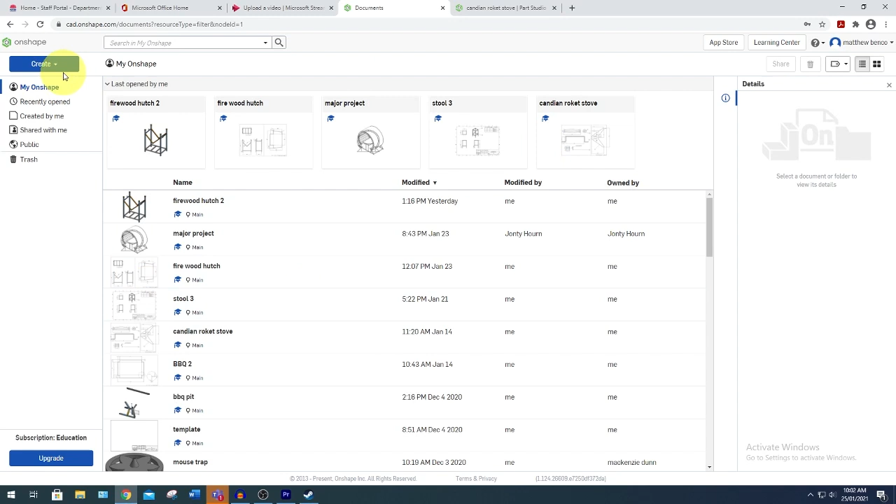Okay guys, here today we're going to be making the Canadian rocket stove on OnShape. First thing you want to do is come over here to create and then go to document. We're going to call this Canadian rocket stove. I'm going to call it Canadian rocket stove 2 because I've already drawn it. And we're going to wait for that to load in.

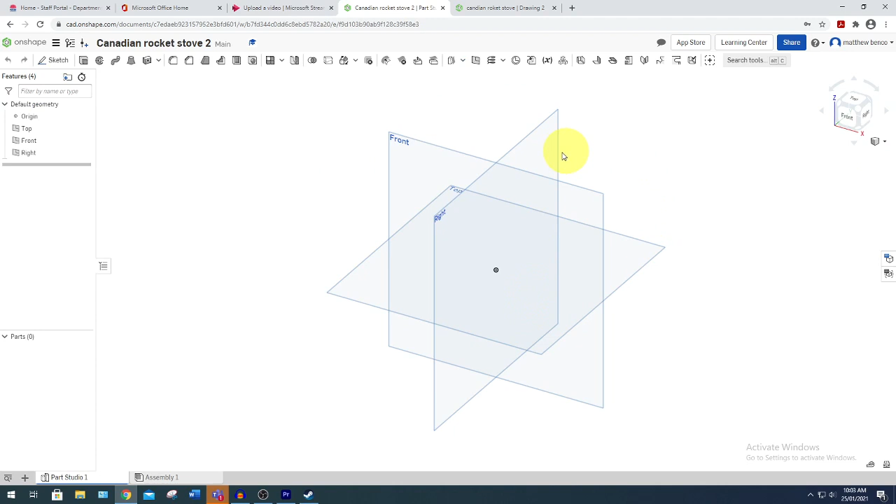There are 24 different parts that we need to draw, and in this first section, the part studio is where we draw them. So we're going to focus in on top, and we're going to use sketch, and then click on top. We're going to come over here to the line tool, and we're going to go from the origin up into the air like this. And we want this to go up 59 mil. And we're going to have a line coming up like this, and then back down there.

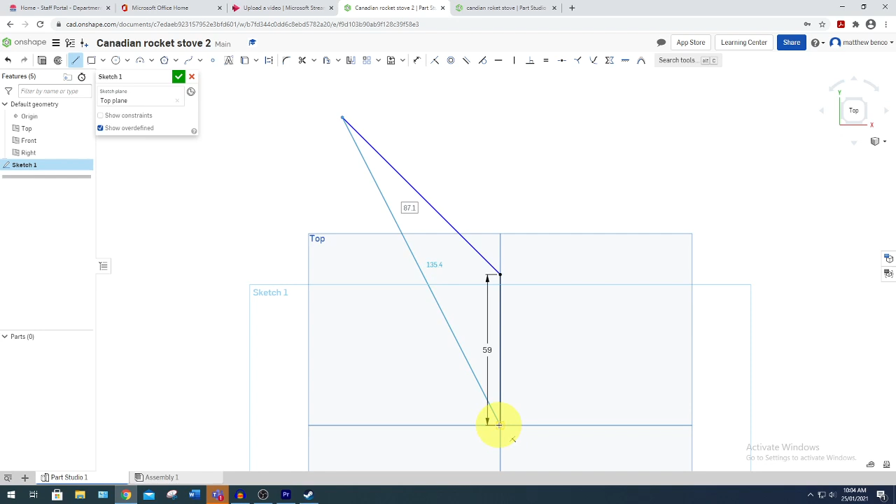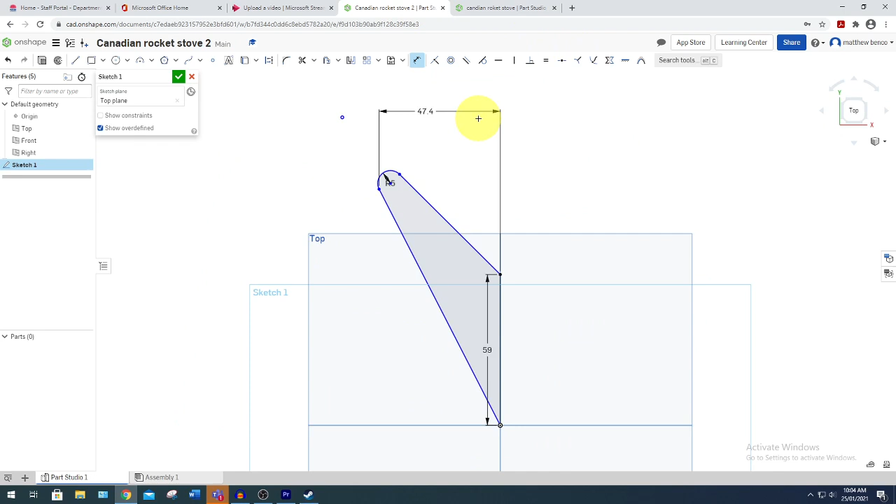We're going to use this fillet tool, and we're going to fillet between this line, and it's going to be a radius of 6 mil. We're going to grab our dimension tool. We're going to go from this edge of the radius back to that point there on that line. And that's going to be 72 mil. We're going to go from this point of the radius back to that edge of the line and drag it out like that so we get the height. And that is 108 mil.

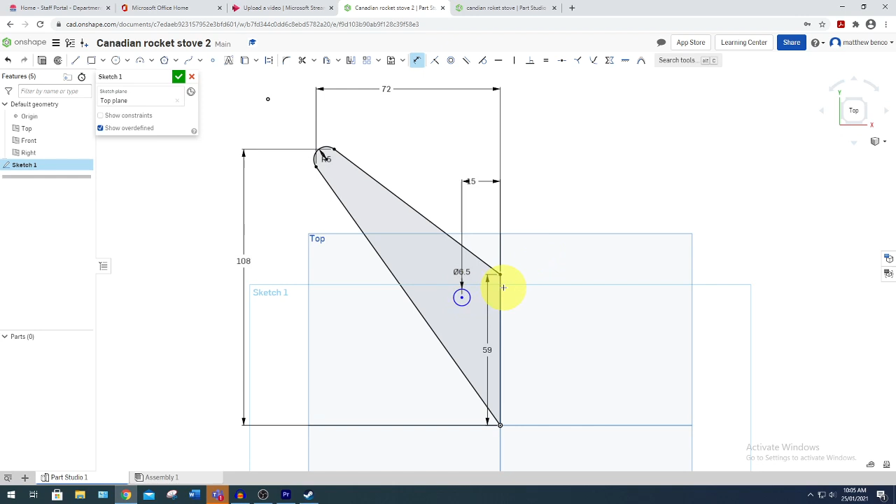We need to put in a little circle just there. So we use the circle tool and just drag it out there. This circle is 6.5 mil diameter. And we need the dimension from the center of the circle back to there. And that is 15 mil. And from the center of the circle back to here. And that's also 15 mil. Push the big green tick, and that's our first sketch done.

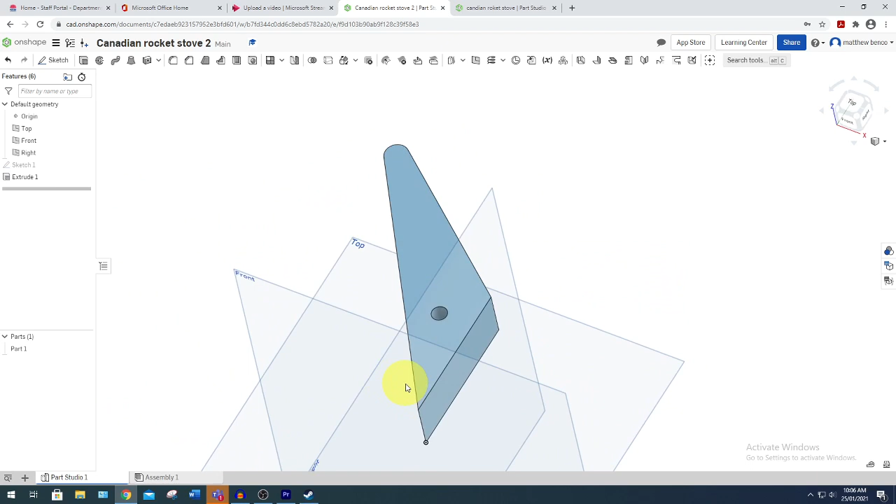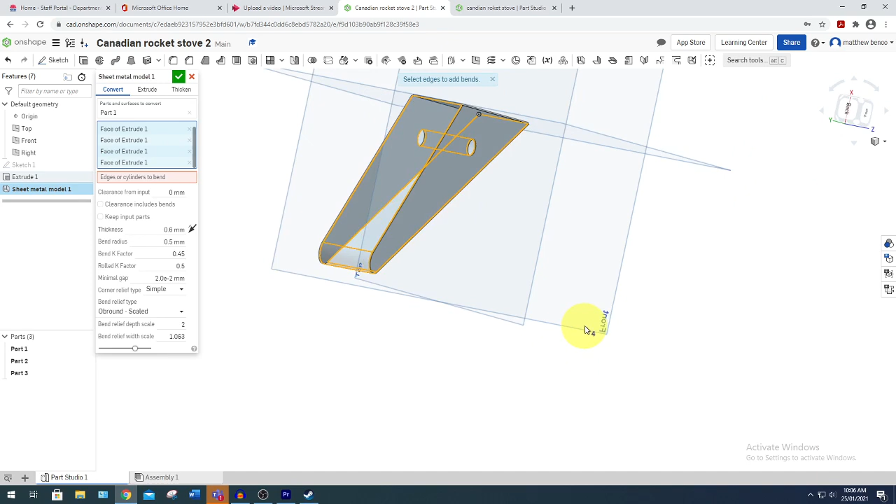Now what we need to do is we need to use the extrude tool to extrude this out. And this comes out for 22 mil. And now we have this block. What we want to do now is use this sheet metal model button, and we're going to select what we've just drawn as the part to be converted. Now faces to exclude, we don't want this one, or this one, and we don't want the inside of that circle either. So we have these three faces here that we're going to bend up, and this is going to hold our leg.

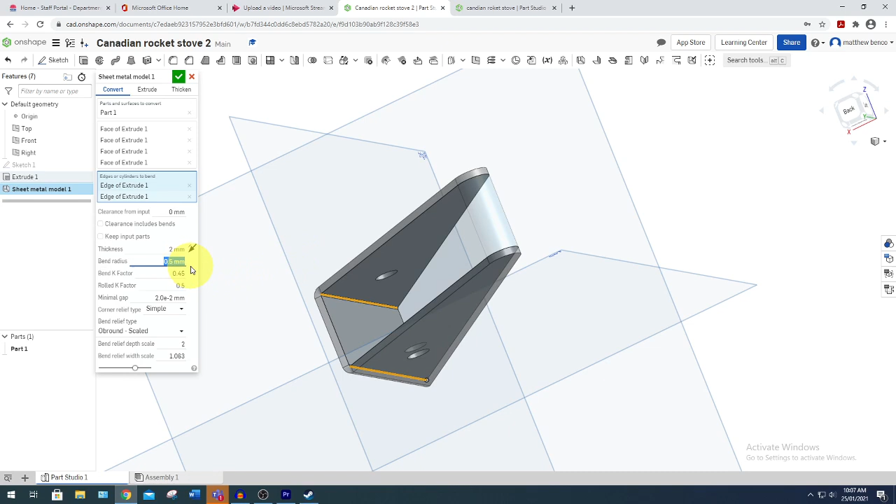Edges to bend, we're going to have that point there, and that point there. We need to make sure that the thickness is 2 mil, because we're using 2 mil checker plate, and our bend radius is just going to be 1. Alright, and that's what it's going to look like. We need to come down here to parts, right click, go to properties, and we call this leg assembly.

Hey guys, Future Mr. Benco here. Since making these videos, I made a bit of a discovery. So throughout these videos here, I add the name of each part into this section here. You don't actually need to do that. The only thing you need to have in this section here is the measurements, not the name. And it's going to be 108 times 175 times 2 millimeter checker plate.

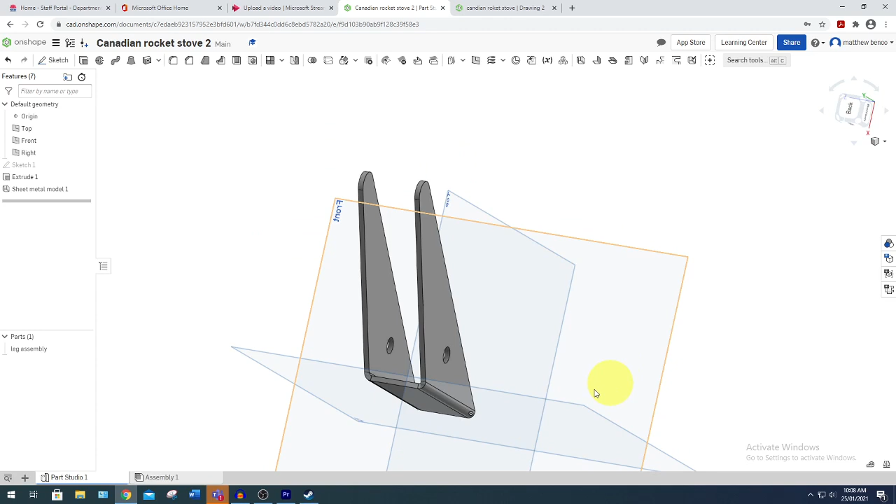And this is part number 1. Save. And now what we're going to do is we're going to hide that away so it doesn't get in our way for drawing the rest of our drawings. Now what we're going to do is we want to focus on right, and we're going to do another sketch. We're going to get the circle tool, we're going to go from the origin out like this, and this is going to be 250 diameter.

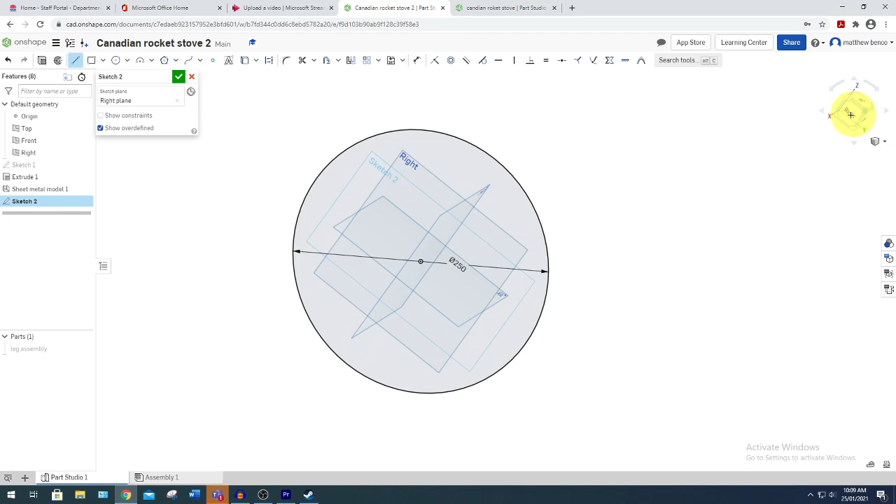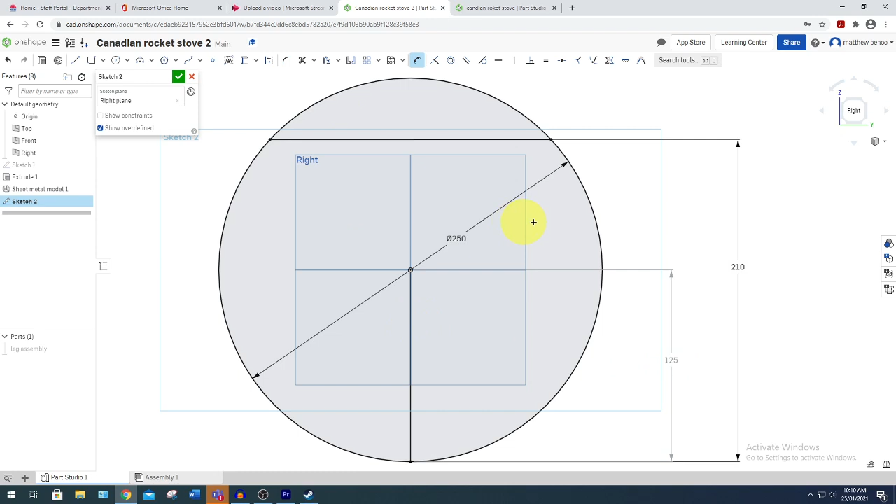We want to have a line that goes straight across here like this. See how it's a dotted line? That means it is parallel to the ground, or this axis here. So what we want to do is draw a second line coming from the origin straight down to the edge of our job here. And then we dimension from the bottom point to that line. And that's going to be 210. We're just going to put that line out there like that. So now we can use this trim tool and we can trim that top off.

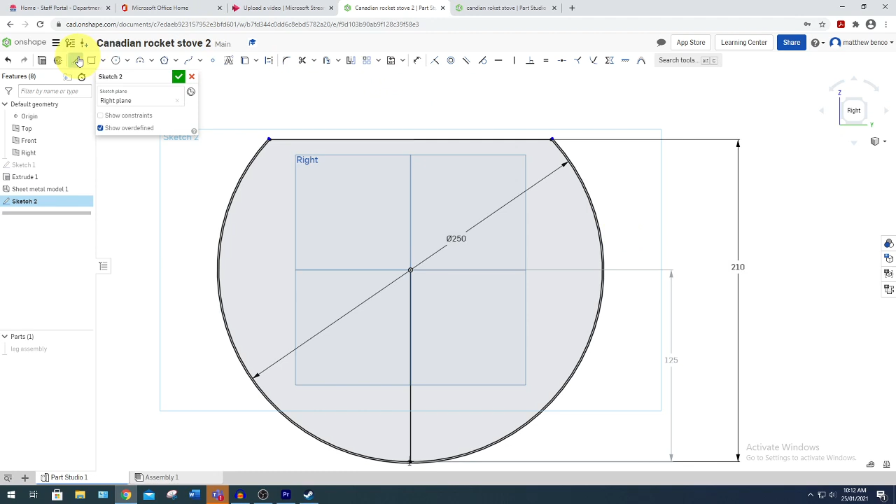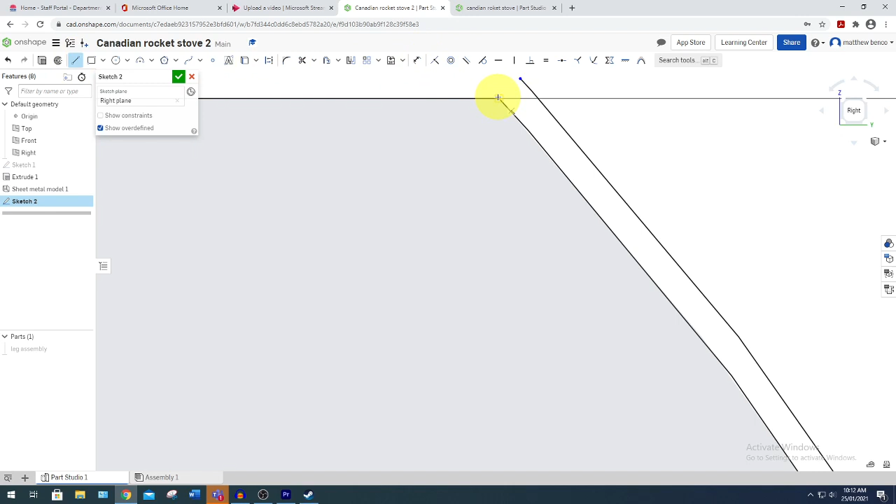What we're going to do now is use the offset tool, select this, and go out like that. And this is going to be 1 mil offset. And then we're just going to have to extend this line back here. Trim, get rid of that extra bit. Remember when you're zooming in and out that you zoom towards where the cursor is. That is our barrel sketch done.

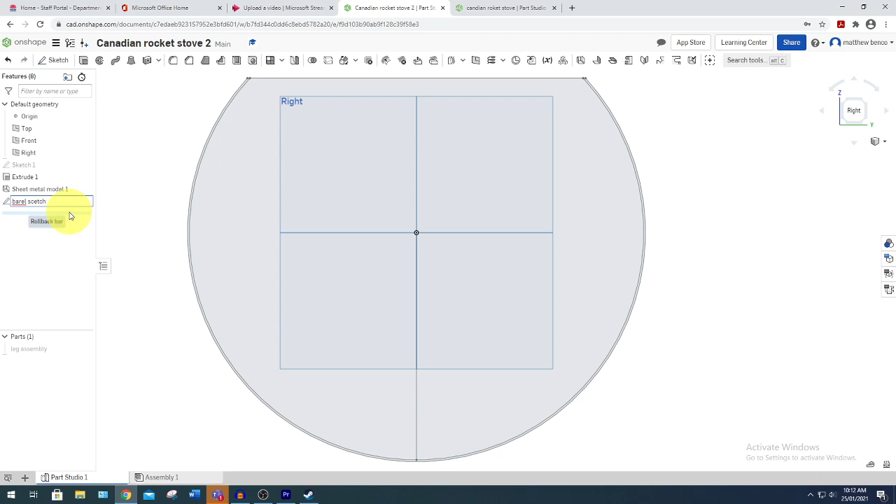And what we're going to do is we're going to come over here to this sketch 2 here, and we're going to rename it because this is kind of an important sketch. We're going to be using it a few times. Call it barrel sketch. Okay, we're going to now extrude that tiny little sliver over there. And we're going to extrude it for 544 mil. So that gives us the barrel of our Canadian rocket stove.

So we're going to right click on this, properties, call it barrel. And this is going to be 544 by 580 by 1 millimeter black sheet. Part number 2.

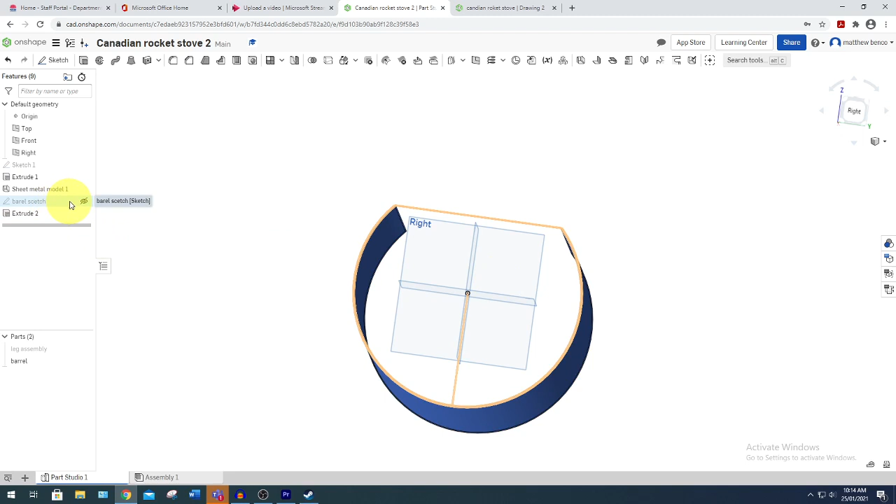So you see how our barrel sketch is now being hidden? We need to just click on this little eye icon and that's going to bring this back. We're going to hit the little eye icon and hide the barrel. We need to come up here to this plane tool, and what we need is the curve point. We want to be on the inside one and the end of that one there. So now what we want to do is sketch on that plane we just drew.

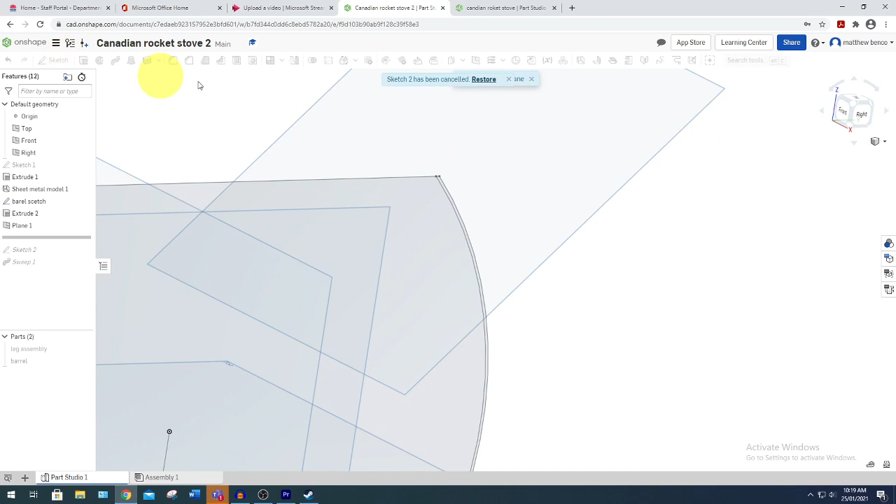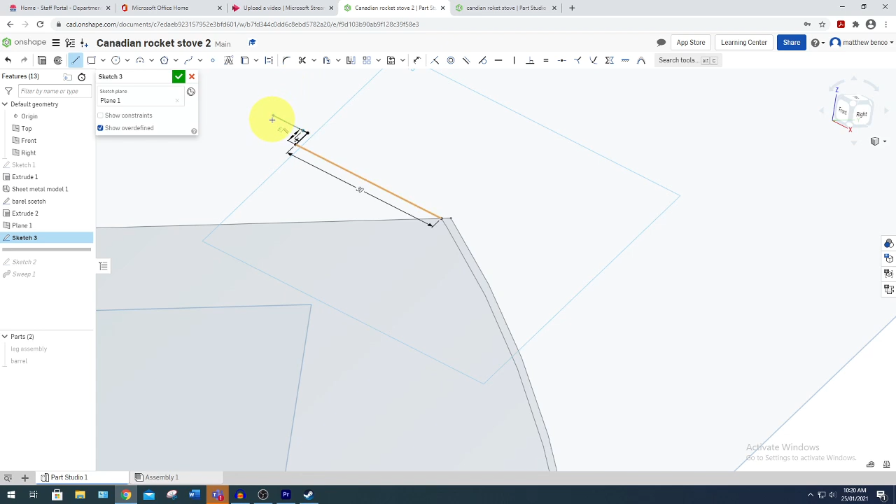We're going to come down here. We're going to start with our line tool coming off that center point there. We're going to come straight back, making sure the line is broken, and that's going to be 30 mil long. We're going to come straight back up this way. That's going to be 2. Straight across, that's going to be 1. And then straight back down, and that's going to be 2.

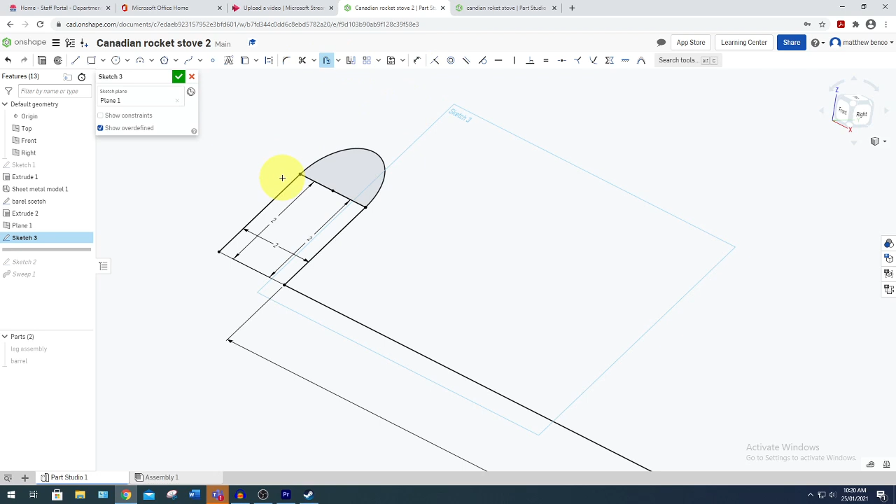Then we're going to use the 3-point arc so that we can do this. That one there should be 2. Now we can use the offset tool and we pick up this line, this line, this line, and this line. Push enter, and then we want this to be offset by 1 mil.

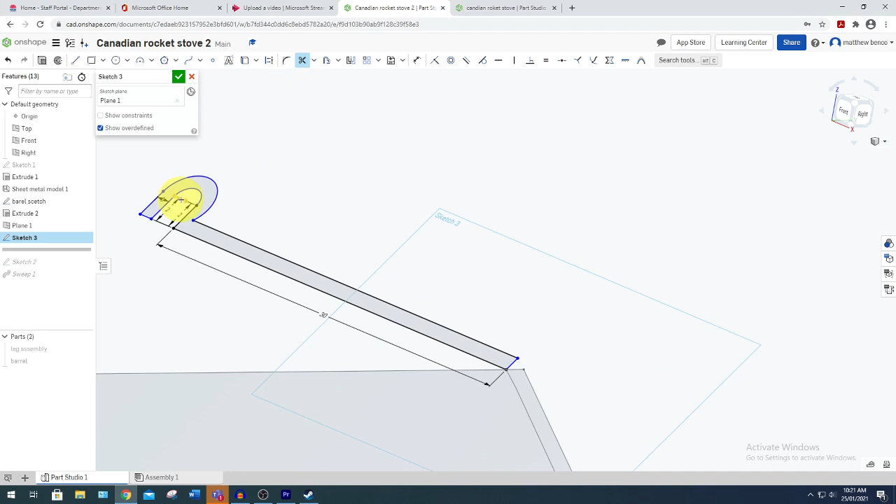And then we can just close that gap there and close this gap here. So we end up with a little bit like this. We can use the trim tool, get rid of those lines there just to make it a little bit neater. And then that's that sketch. So hit the tick button.

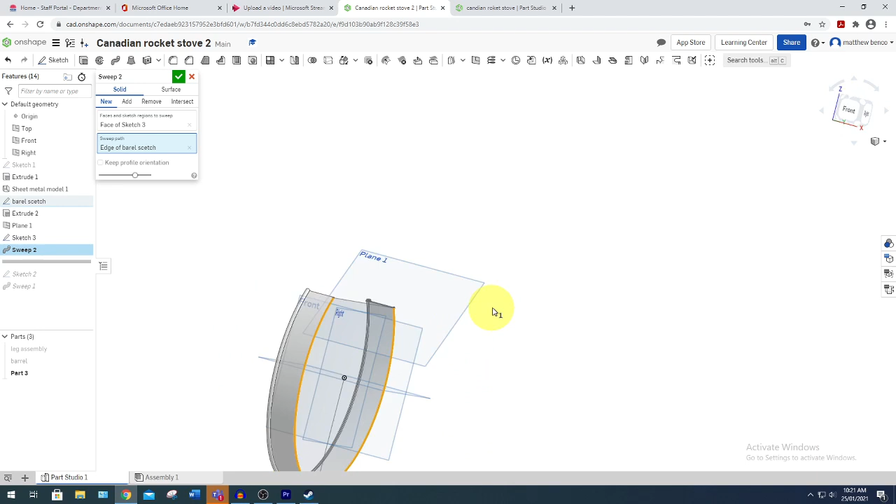Now what we're going to do is use the sweep tool. Now the faces to sweep is that little thing that we just drew. And the sweep path is that inside corner, inside edge there. So you can see that's swept around this thing to make this barrel seam thing, and the ends of our rocket stove sit into that little groove there. And then this sits inside the barrel that we just made.

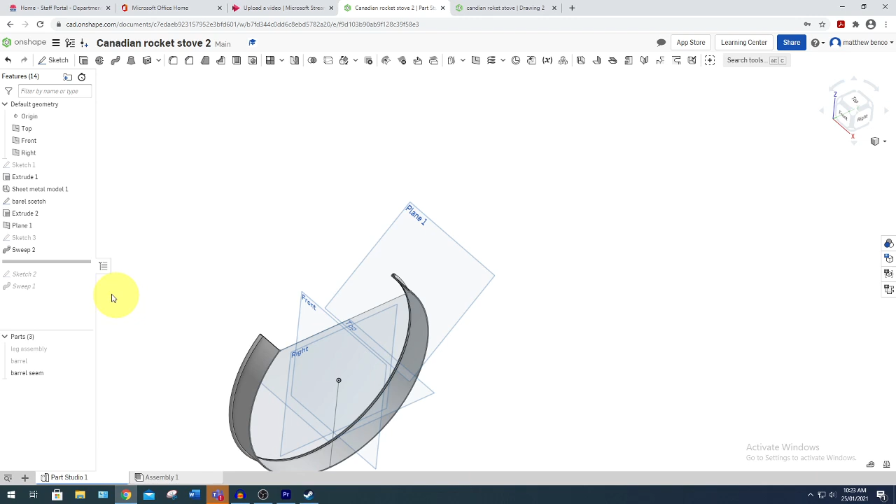Tick that. Right click on that. Properties. We're going to call this barrel seam. And this is 40 by 580 by 1 mil black sheet. This is part number 3. Save. I'm going to hide that away again. We're simply going to use the extrude tool, and we're going to extrude this and that little bit there. And this is going to be 2 mil thick, and that's it.

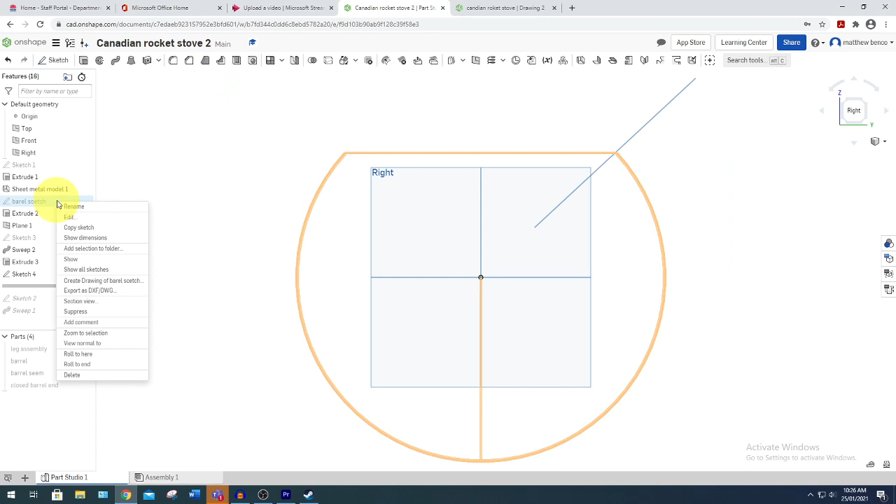We're going to right click on this, go to properties. We're going to call this closed barrel end. And this is going to be 250 by 210 by 2 mil check plate. And we're up to part number 4. Save. So hide that thing we just did. So what we need to do is right click on this barrel sketch and hit copy sketch. Create a new sketch and paste it in.

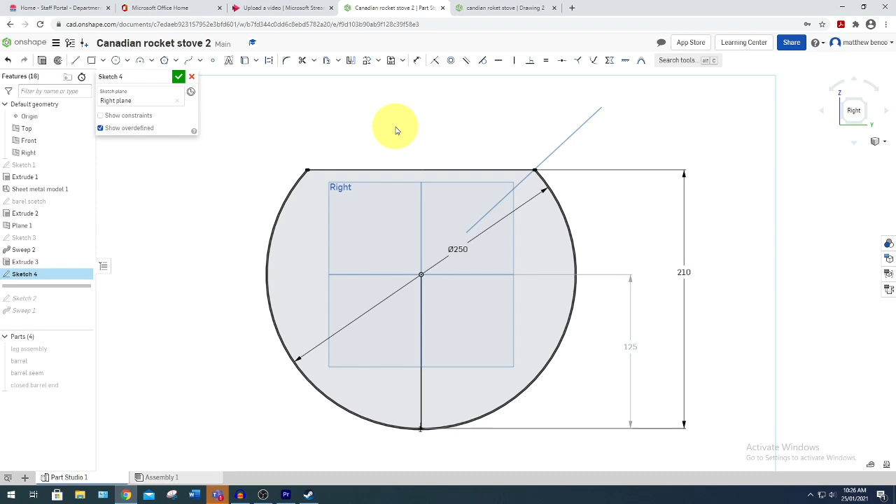And we're just going to move this back to the origin point so that everything turns black again, because black is a nice color. It actually means that everything is dimensioned back to this origin point, which is a very nice thing to do because it stops things from going weird. Anyway, what we got to do now is add in the little hole that goes in the front so you can put timber and stuff into our fireplace.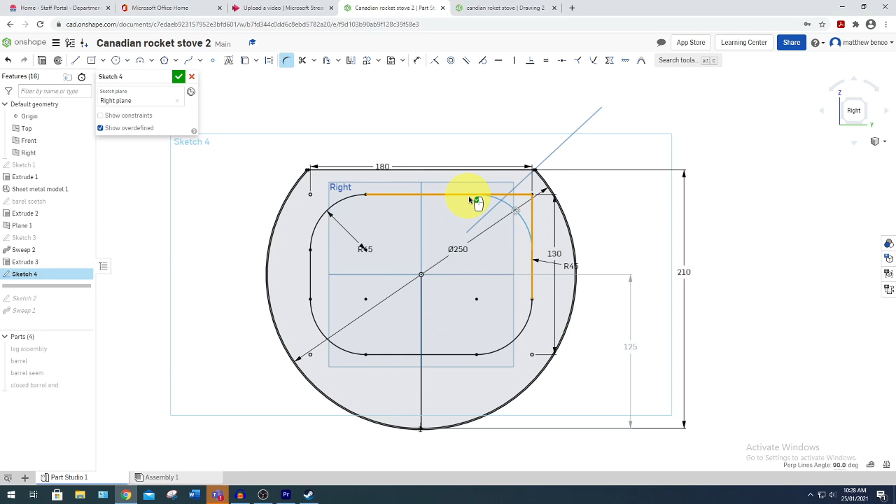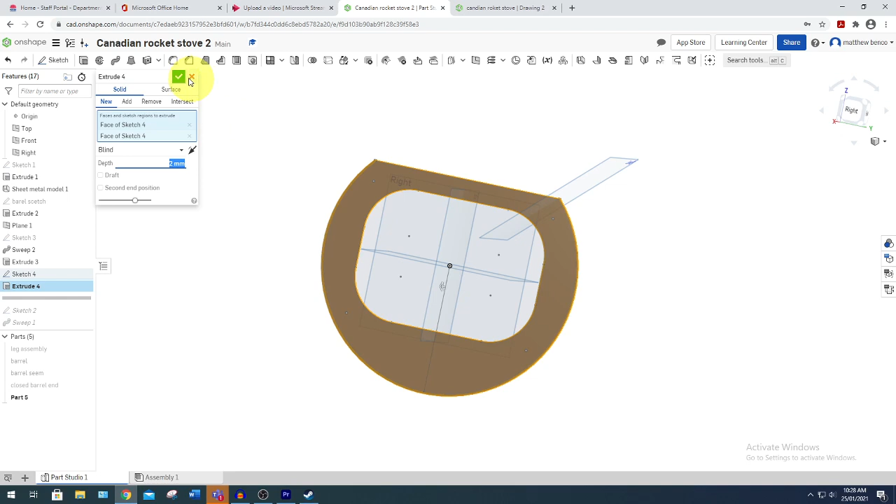Now we're going to extrude this and that little edge on the side. And this is going to be extruded 2 mil. So now we have this surface here with a little hole in the center. Tick. Right click on the part 5, go to properties. We're going to call this open barrel end. And this is going to be 250 times 210 times 2 mil checker. And this is part number 5.